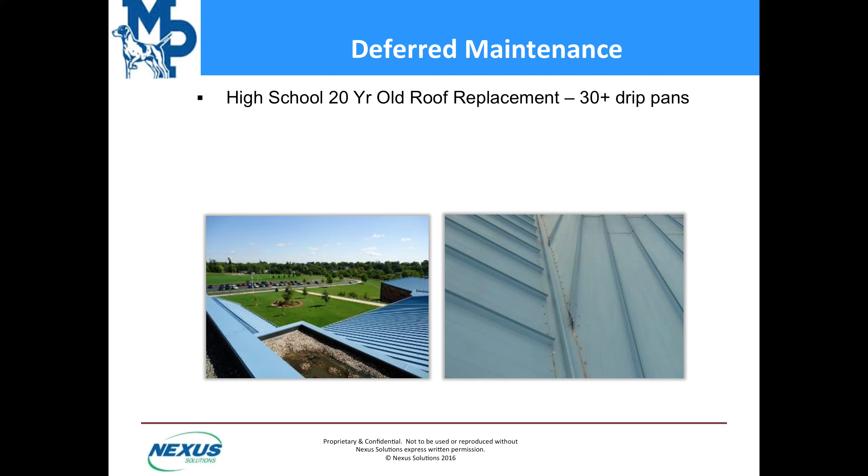Other areas we'll talk about are the building envelope, which has cracks in our masonry. We have mastic that weeps up through floor tile, and flashing that's allowing water and air into our building. We have hardscapes with parking lots in disrepair, sidewalks that need replacing, and concrete that's breaking apart. One area where we know we need upgrades is our kitchen. Our dishwashers are 20 plus years old, and there's additional need for cooler and freezer space as well as upgrades to our cooking materials.

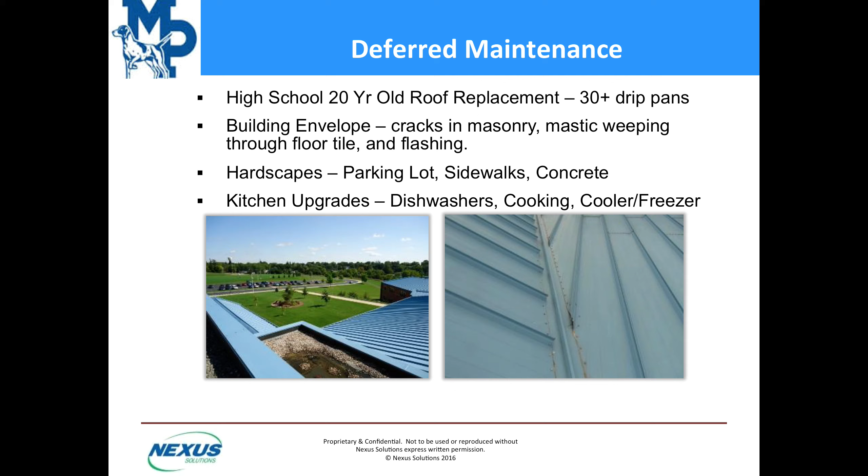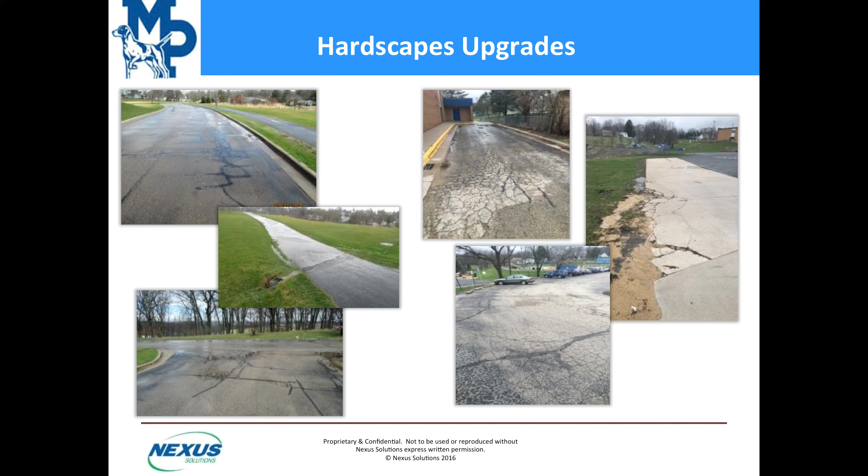Here you'll see pictures of our hardscape upgrades. We have many parking lots with spider cracking. We can no longer crack, fill, and seal these areas, as new asphalt will no longer adhere to this old pavement, so we really need a full takeaway and replace of these breaking up parking lots. To the far right, you'll see concrete that has crumbled and deteriorated over time, and there are many sidewalks in disrepair as well.

In this slide, you'll see pictures of proposed drainage upgrades. We have areas where water is washing away the grade. We have standing water in parking lots, old catch basins for water that just need to be updated, and many places where the water actually runs back to the building and ponds and undermines the foundation.

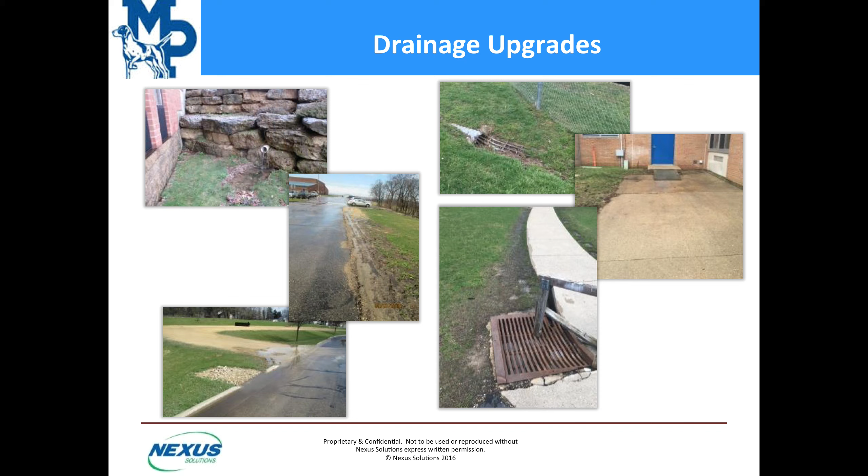In this slide, we're looking at indoor environmental quality measures. At the elementary school, we'd look to add air conditioning, and at the middle school and high school, we would expand the current air conditioning system.

At the elementary school, we know we need to replace a 1966 boiler with a more energy efficient furnace. Also, there's plumbing at the elementary school that is in need of repair, more specifically a water heater that's at its end of life, and 1966 galvanized piping that's in need of replacement.

At the middle school and high school, if we automated our air handling units, we would be more energy efficient. And in the technical education classroom where they cut wood and dust is collected, that collection unit is actually from the old high school and is in need of replacement. It no longer meets state code and is not properly functioning.

At our agricultural building, we're looking at replacing the air handling unit that's actually inside of the classroom, and when it turns on, it makes a learning environment very hard to hear. We would move that from inside to on top of the roof of the ag building.

And then finally, in the middle school and high school system, we would look at a water softener system that would allow us to not have the hard water that we currently have that is gumming up a lot of our faucets, lavatories, and shower heads with calcified remnants that causes our water not to flow properly.

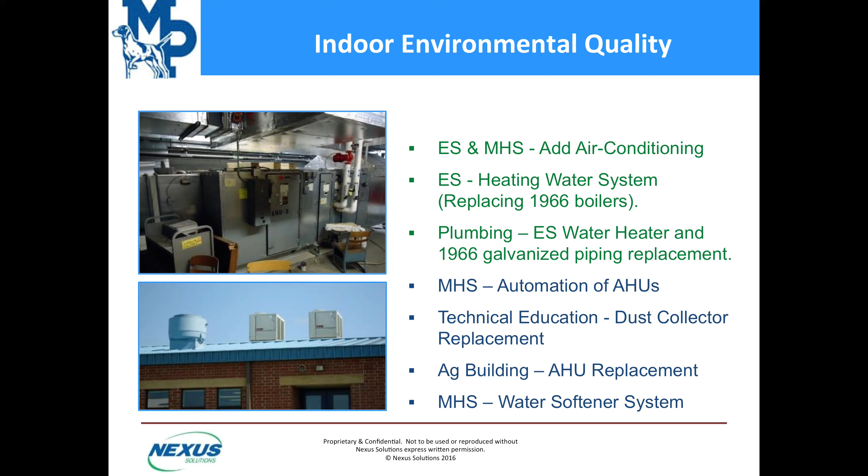In the area of lighting and electrical, we would look at enhancing our facilities with interior and exterior LED lighting. We would be more energy efficient and give us a brighter space for our learning environments.

At the elementary school, a 50-year-old building wasn't built with today's use of internet, and we would simply want to replace that electrical system and put a minimum of 3 power outlets in each room to charge our devices of today.

Lastly, at the elementary school, there is no backup generator, so if the power goes off, we simply don't have a lighting system to come back on to continue our education until such time that the power comes fully back on from the grid.

We are also looking at improving some of our safety measures. At the middle school and high school, we'd like to expand our current fire alarm system. It was built to code back 20 years ago, but in today's world it would no longer meet state code.

So we'd like to expand that, as well as at the elementary school, just replace the entire fire alarm system that's closer to 50 years old.

We'd like to expand our security camera system to include cameras inside of the building at the elementary and in some high use areas at the high school, as well as looking at our bell system, our PA system, and our speaker system all being tied in together with our phone system so that we have one consistent unit for communicating in an emergency.

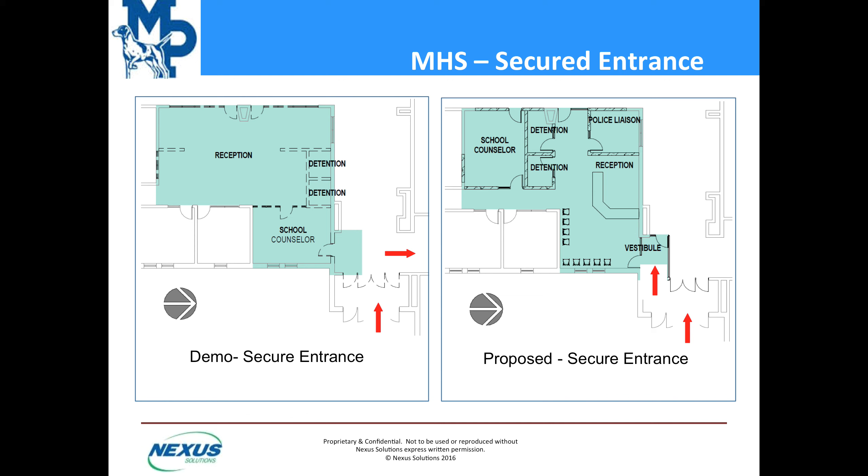At the middle school and high school, an expansion to our agricultural shop would help us with many different pieces. First, we don't have a secured entrance at the back of our building where students exit and enter into the ag building from our existing building. To secure that entrance, we propose putting a covered walkway that would allow entry into the expansion onto the agricultural building. It would also serve as additional storage space and connect to the existing ag building, allowing a loading dock to unload metals directly into the welding shop.

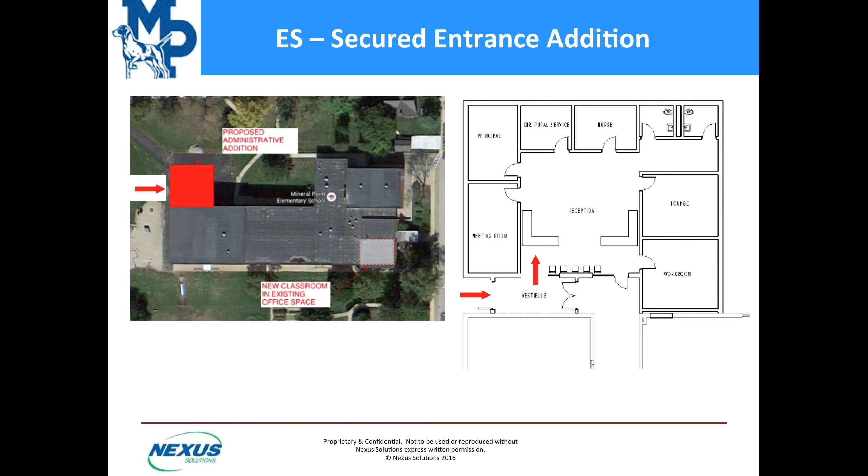A secured entrance at the elementary is also being proposed. To orient yourself, the top of the picture is Front Street and the right-hand side is Cawthorn. The red area proposed would be a two-story administrative addition with classrooms on the second floor. This pattern would allow people to enter from the left side into the building, and once inside, would force people into the reception area from a vestibule to check in, state their intended business, and then back out in order to enter the building in a secure fashion.

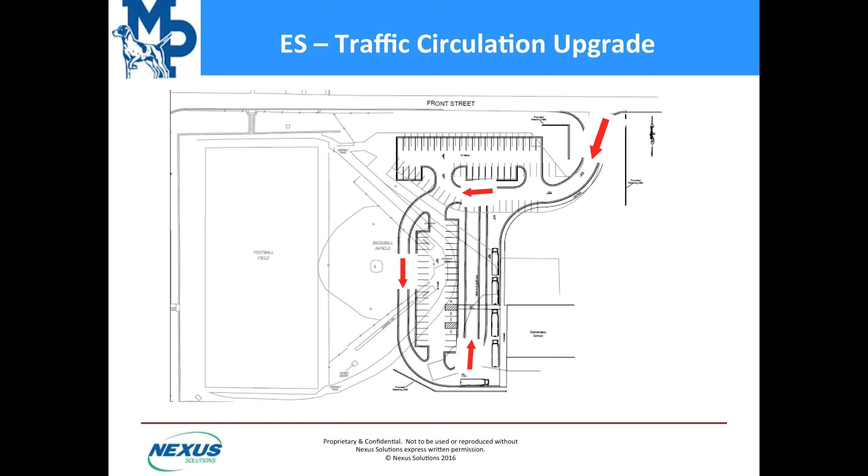Reconfiguring those spaces would allow 4K, kindergarten, and first grade to be on the first floor, along with additional spaces for occupational therapy, physical therapy, and our English language learners, moving them out of a janitor closet into a real classroom.

Moving to the second floor and reorganizing our departments would allow us to move some second and third grade classrooms above the new administrative addition and reallocate our spaces for third, fourth, and fifth graders. Currently, our fifth graders are some of our largest bodies in some of our smallest classrooms.

One might ask, with all this reorganization, wouldn't it be better just to build a new elementary school? The board does have that option before them, but a new elementary school would cost just slightly under $20 million. If we were to do every renovation and enhancement proposed at the current site, the elementary renovations would total just less than $9 million. At this time, we think that is the better way to go, as the elementary building is still structurally sound and with some enhancements could be a very good learning space for our children.